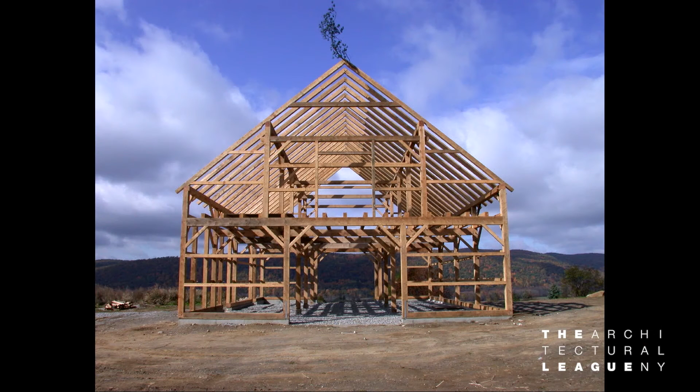It's a bit like the beginning of the 20th century when steel and concrete came to the fore, and there was all this sense of experimentation and the new things that could be possible with the material. But we also looked backward a little bit, so we looked at the history of heavy timber construction and timber construction in the Northeast, and in particular barns.

Because barns have this incredible fit between the structure of the space and the space itself. The form of the barn is so well integrated with the actual structural system. It's an architecture of structure and space, we would say. And of course, barns are made up through these things called bents. So these are two-dimensional constructs that can be arrayed in progression to create the space of the barn.

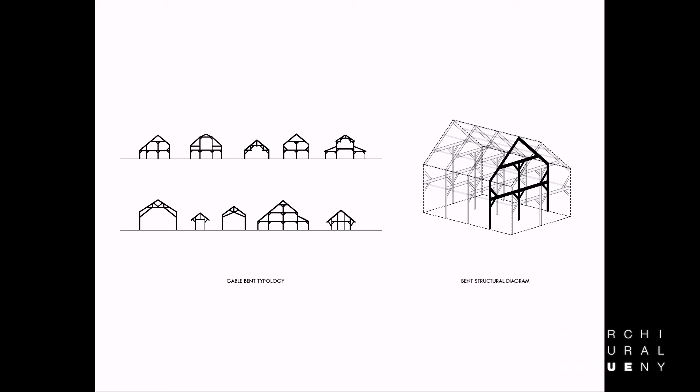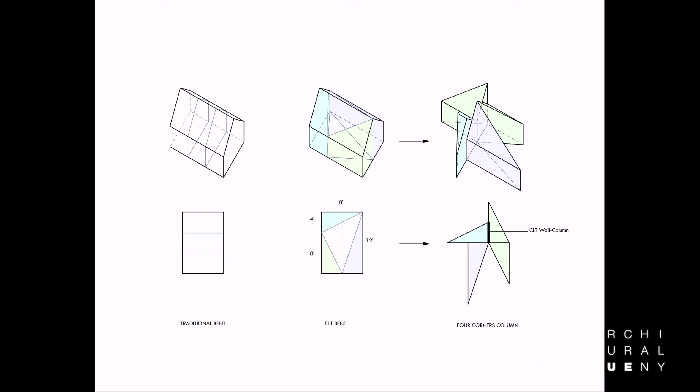But of course, thinking then of the space of barns in relationship to CLT, this new engineered mass timber technology, there's this friction, right? You can't just reproduce the two-dimensional bents and have it work. You have to think about using this planar material and perhaps start to build these complementary corners that could start to be more rigid and come together in a new way.

So starting out with the form of the barn, taking it apart and rearranging these complementary corners, you can imagine creating this endless field of these things where all the three-dimensional bents are now interdependent.

And for the installation, you can see really that the interior spatiality of the barn is turned inside out. It creates this series of rooms that open up to its context. So, corridors, these pockets of space around the installation that open to the windows, as well as a little courtyard in the center.

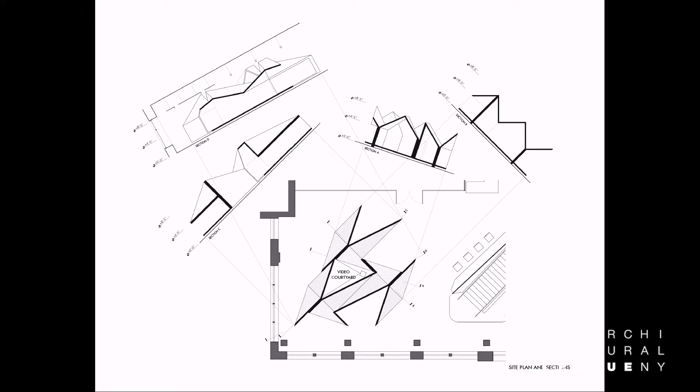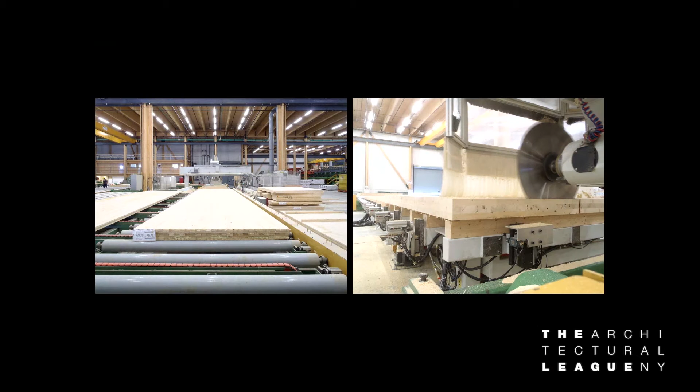And basically, the way the process worked was that Nordic makes these 8-foot by 64-foot slabs of solid wood that you can see in their factory on the left, and then they cut them down to your specifications using their CNC cutting devices, which you see on the right. And we had to work with both companies very carefully through a year-long design process in order to come up with a series of details that were clean and spare, but also were easy to assemble and could still be fabricated by the machines, which had their own limitations.

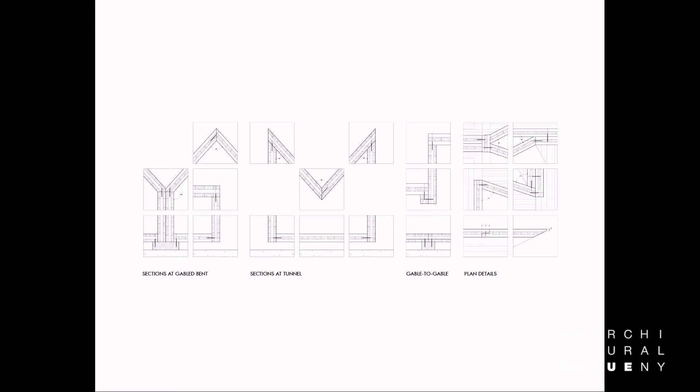And what was great about the process, even though it was a lot of work at the time, was that the results of it, if you planned it out carefully enough, were that you could take this rough structural material and create very large spans with it and have 5 different pieces come together with a tolerance of only 1/16 of an inch.

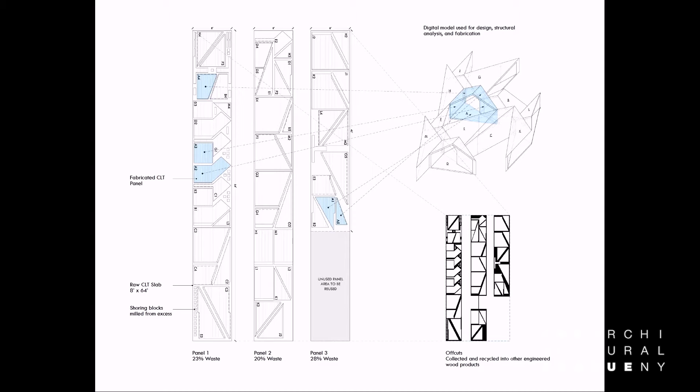Typically CLT is used in commodity circumstances, so most of what they usually do is cut rectangles out of rectangles. We had efficiency targets to meet to get the project on budget, so we had to work through a space-packing exercise to figure out how all these crazy pieces fit onto the 8-foot by 64-foot slabs of CLT.

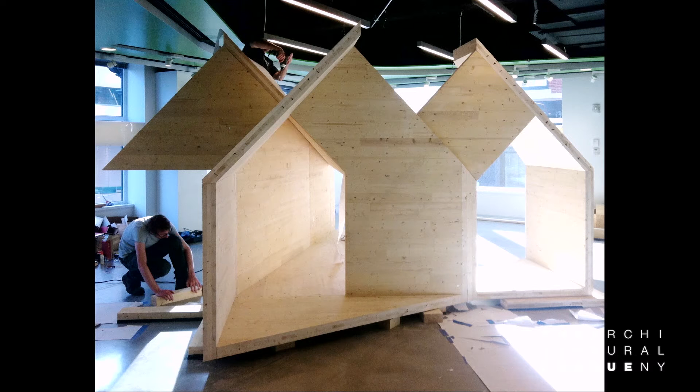We worked with a small group of friends and Parsons students, three of whom are shown here, to construct the project in the field. They're lifting this roof panel, which probably weighs about 200 pounds. Despite the bulk and heaviness of these panels, the project went together really easily—in about 3 days.

What was really nice about the final project was that it didn't result in a single image, but that it was really necessary to move around and through the installation in order to understand it and see how it presented itself from all these different aspects.

We also worked with a video artist based here in New York, Noah Klersfeld, who's in the audience tonight, to figure out how to program the little courtyard that Yasmin showed, in order to encourage people to actually move through and into the space. He generously donated 3 of his videos to play in the courtyard during the entire exhibition.

We also had Nordic drill these little peepholes in the wall of the corridor so that you'd be drawn into the corridor to see that video through those holes, and it would also bring a kind of lighting effect into the courtyard. And that's the view out.

The second project is also a competition, for the Chicago Architecture Biennial last year. For us, the prompt was very intriguing because they were essentially asking designers to design small kiosks that would remain in the city after the biennial would leave. This idea that it would leave something permanent, this act of generosity to the city, was very interesting to us. And of course, the site is this incredible place where the relentless grid of the city meets the beach.

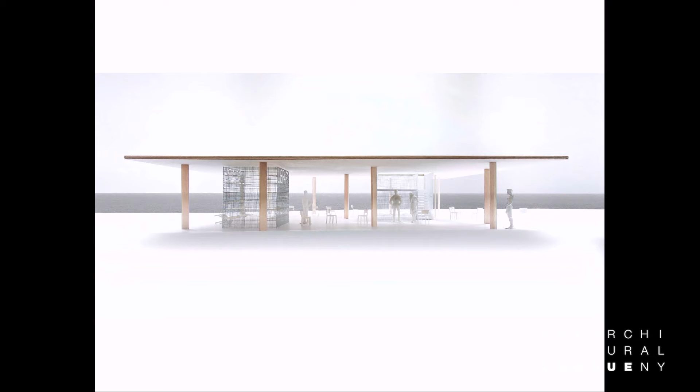The competition actually stipulated a 200 square foot kiosk, and we felt that in order to really have a more active engagement with the city, we would try and expand that as much as possible. So it became this quest, I would say, to design the largest, thinnest wood roof possible.

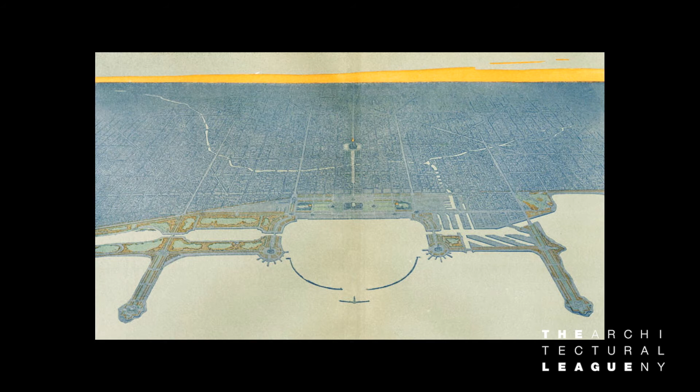And being right on the lake, there was this incredible opportunity to engage the horizon. So the project tries to use the large flatness of the roof to both look at the horizon of Lake Michigan beyond, but also, when you get up above the roof, the roof becomes this abstract plane that can reframe the city.

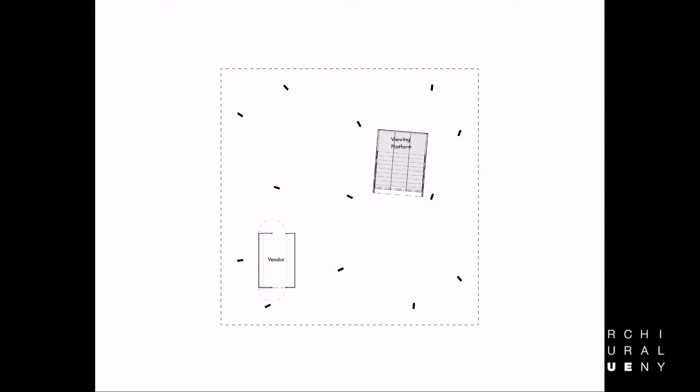So the plan is incredibly simple. Just to give you a sense, the space labeled vendor is the square footage that was asked for in the competition, and the dashed line is what we proposed.

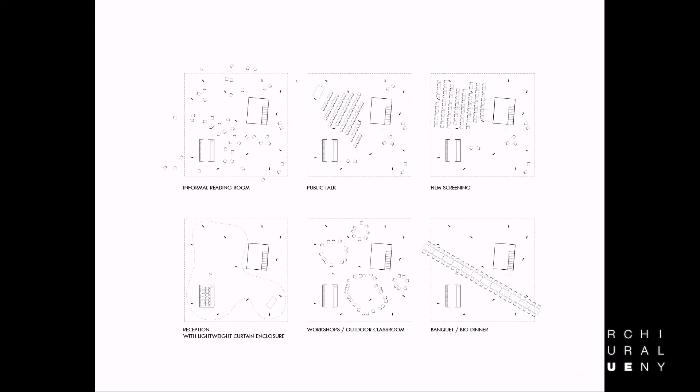In order to do something like this, it had to be incredibly simple. It was really about trying to dissolve the boundary of the kiosk into the city, encouraging different users to come into the space and use it as they see fit. So there are three elements to the project: a very large wood roof, 56 by 56 feet, a set of 13 columns that support the roof arranged in this random pattern, and a kind of leisurely but engaged public that would come to occupy it.

So in order to make this shift in scale, we had to really pare down our material palette to the minimum possible. So we knew that we had to have the structure, so we worked with CLT again for this project. And then for the enclosures, we didn't have much specification on what the enclosures needed to enclose, and so we thought, well, maybe chain link fence is enough. So we just worked with chain link mesh fabric, but both materials in a kind of scale and context that's a little different from where you usually see them.

And we were pretty quickly confronted with this question of, well, okay, what is the biggest wood roof that you can make? And we knew that we could get these 8-foot by 64-foot panels of CLT, but it turned out that the real limitation was not on production, but on shipping, and that the largest size you could reasonably ship was on a 53-foot trailer, and we somehow managed to convince them to put a 56-foot piece onto a 53-foot trailer, and I don't know how that got across the border, but it worked, and that set the dimensions of the project.

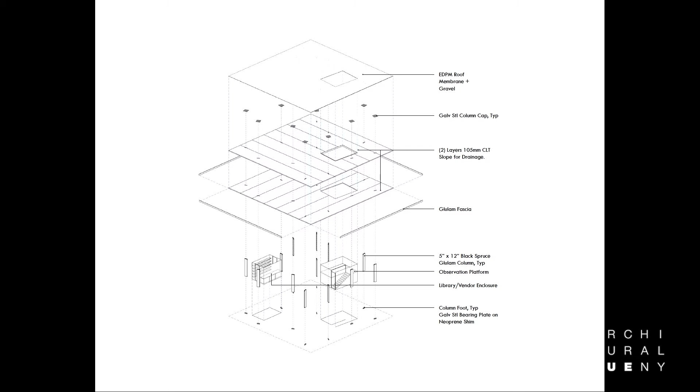And so the scheme seemed fairly simple at the start, which was in order to get this kind of flat wood roof that behaved somewhat like a concrete roof, we would just take 7 panels of CLT and run them north-south, and then put another 7 panels right on top of that running east-west, and support that on 13 columns. What we didn't realize at the time, we were acting kind of naively, was that usually CLT is supported with beams, and so this turned out to be a kind of first of its kind structure, thanks to Brett's perseverance on the project.

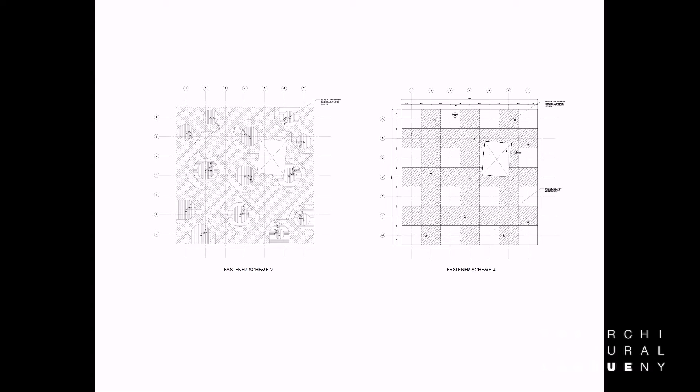So one of the major crises in the project was actually figuring out how to get those 2 layers of CLT to work together, structurally but also economically. So we worked kind of frantically through the last summer, through many different fastener schemes, including one that involved a lot of glue. And you can see the scheme on the left, which was one of the earlier schemes, involved about 15,000 screws, which cost $2 each and wouldn't have worked. And the scheme on the right, fortunately, got it down to about 3,000 screws.

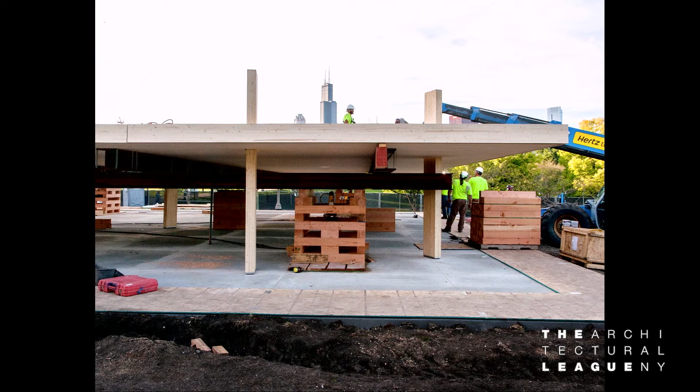And then we were, of course, as Yasmin mentioned, looking at Mies van der Rohe as a kind of spiritual godfather of the project, and especially at the New National Gallery, where they raised up the roof on the columns at the end of the project. And we thought, well, wouldn't it be romantic if that was how it was built? And so we showed this image in the competition. And then after working through it with the fabricator and the structural erector, it turned out that actually was the best way for safety reasons, interestingly enough.

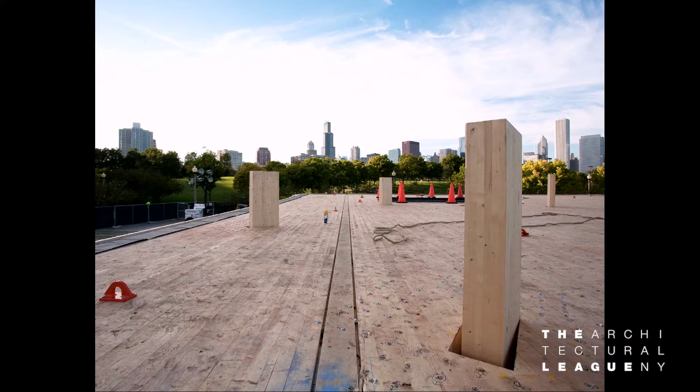So they ended up building it just a few feet off the ground on steel shoring, and then using pneumatic jacks to raise it up. That's the view from the roof halfway through. And then in order to keep that wood ceiling surface as clean as possible, we worked with Brett and with Nordic to develop this column capital detail that actually hangs the roof, suspends it from above rather than supports it from below.

And then I guess the second material that's quite visible in the project is also this kind of rough material of chain link. And we're quite interested in it because, on the one hand, you see chain link everywhere. It's usually stretched horizontally between very heavy vertical posts, but also it has this interesting history in that it was invented by a textile manufacturer. And so we were really interested in trying to think, is there a way to treat it as a textile, with this kind of lightness to it?

And so we worked on the detailing to actually stretch it vertically between the roof plane and the ground, and also to eliminate all the framing at the corners of these volumes so that there would just be this very light touch in the space to delineate those two volumes. So the site is actually just north of the Shedd Aquarium and the Field Museum in Chicago, and it's right on the lake, and has this incredible view back to the city. We were very lucky.

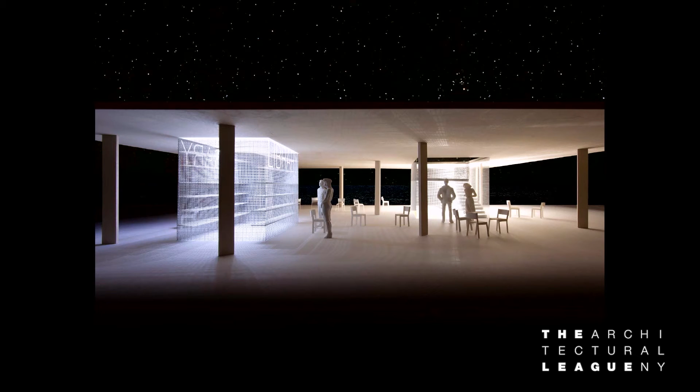And one other aspect of the project, it being out in the world, we really wanted to extend the life of the project into the night. And so we developed a lighting installation that would illuminate the two volumes below through two different color temperatures of LEDs. So one warm, one cool, one more like daylight, one more like moonlight, and then to program these in such a way that they would start to come on just a few hours before sunset and then pulsate throughout the night. And so you saw two views of those at night.

And I should mention these photos are by Naho Kubota, who's an incredible photographer. And she took this one, which really startled us because it looked so much like our initial model. And we really enjoyed that.

And this final project is our proposal for the PS1 Warm-Up competition, which we did this past winter. And we were really interested in making a hybrid between what have become the two standard typologies of the PS1 proposals. One is the environment which takes place under a canopy, and the other is the sculptural or iconic large-scale project that's visible from the street. And we thought the way to approach this was to think about it through the boundary, which we saw as this fundamental architectural act that creates the basic difference between two spaces inside and out, and thus facilitates different types of culture between those spaces.

And we were working at PS1, which is formerly a public school, and so we started looking at old schoolyards and how the schoolyard functioned as this interesting place that was attached to the adjacent institution, but not really of it. It's this place that's usually lightly veiled by a chain link boundary that protects it both from the harsh realities of the city, but also from the school and the stern teachers inside. And so it's this place where students escape even just for a few minutes every day in order to play their games and get into mischief and formulate their own rules, which then come back and infect their work in the school and out in the city beyond.

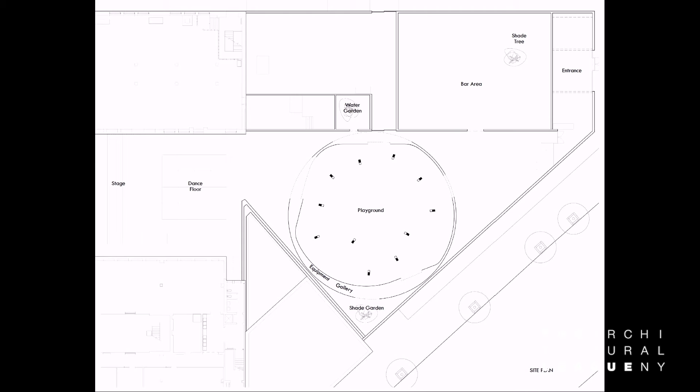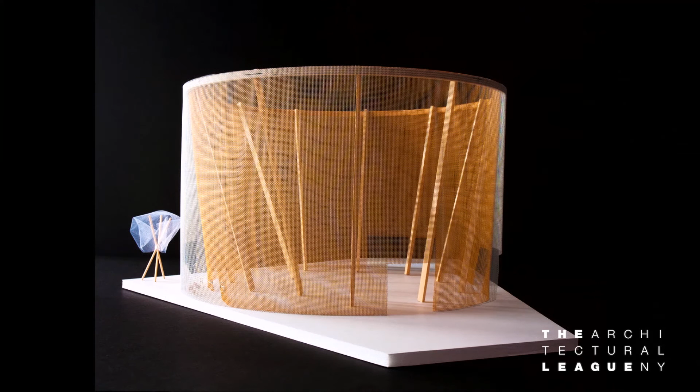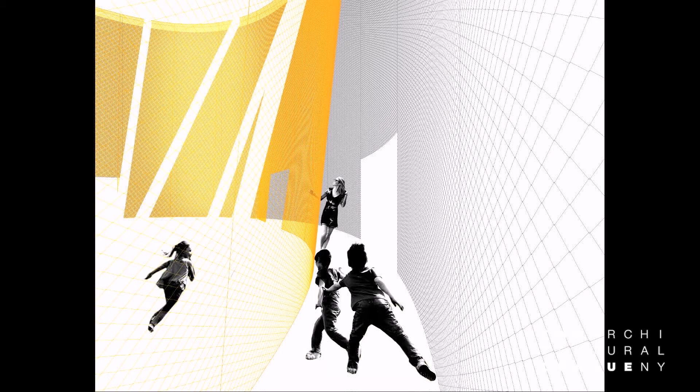And it's also something that's very tall. We proposed a 50-foot tall volume that would very lightly screen the city beyond, to create this necessary precondition for fantasy and for play, this kind of removal. And that boundary, we propose to make it out of two layers of chain link. So one is a vertical outer layer and one that's more playful, one that's just left galvanized, another that's brightly colored, to create a boundary that has a certain depth, that's ready for exploration.

So then we went and talked to Brett Schneider again, and we said, okay, how can we really do this? And we worked through a long series of structural models in order to figure out how to make this thing stand up, but also how to preserve that idea of the lightness of the boundary. And an interesting outcome of this result was that we ended up using the same materials as in Chicago, but in inverse proportion.

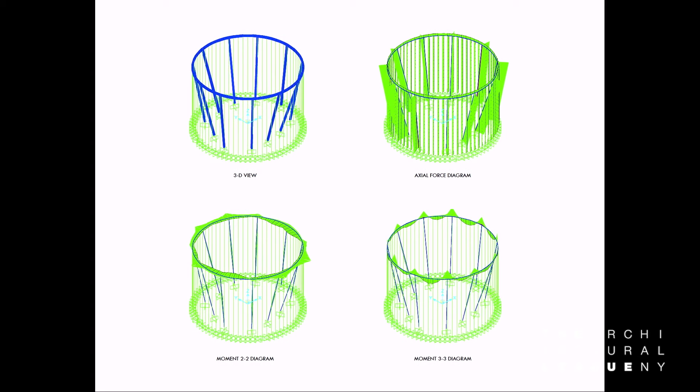And in the case here, both the wood and the chain link are performing structurally. So it took a while for Brett to figure out how to model it in a satisfactory way so he would be convinced that it would be safe.

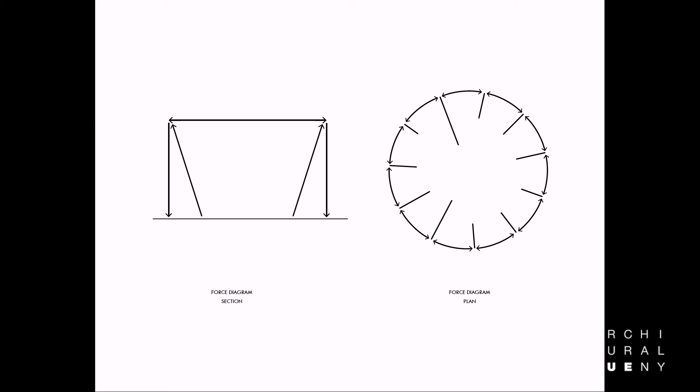And it turned out that the resulting concept was analogous to a bicycle wheel, except stretched horizontally out of plane. So there's a timber tension ring up at the top 50 feet in the air that's supported by a series of canted columns that are analogous to those bicycle spokes, that's then all pulled down and made stable by the chain link that's tensioned to the ground.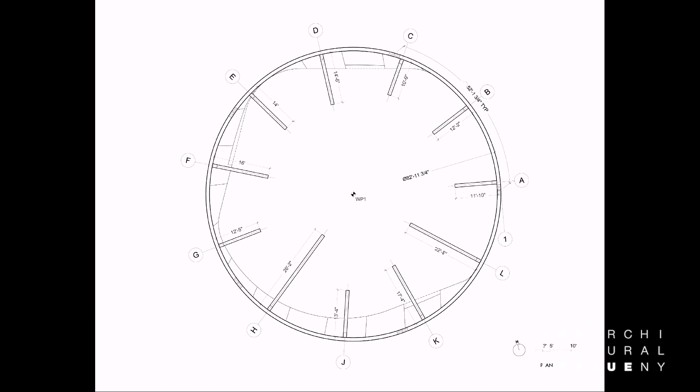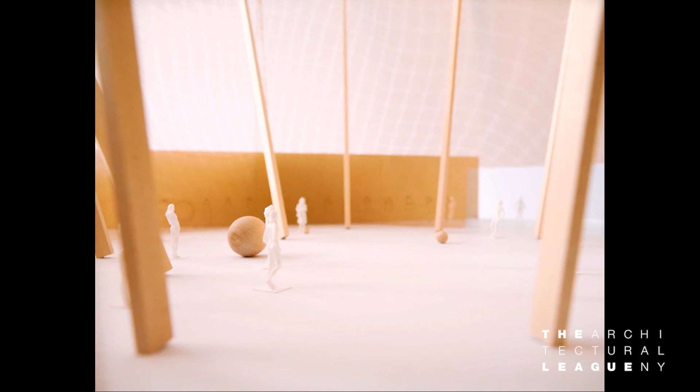And of course there's been 19 years of PS1 installations before us, so we don't really know what's under the ground, so we came up with this flexible system of columns that could be moved back and forth on site depending on what we found, and that would also serve to give a subtle hierarchy to the interior space.

Yeah, so the hierarchy is important because it's absolutely not just a neutral space. I think the way the columns enter the space creates an order that we imagined would be used for different programming possibilities. So on the one hand, there's the warm-ups and there's the free play during the day. But on the other hand, we imagined that players and performers could take advantage of some of these geometries and use them for rule-based movements.

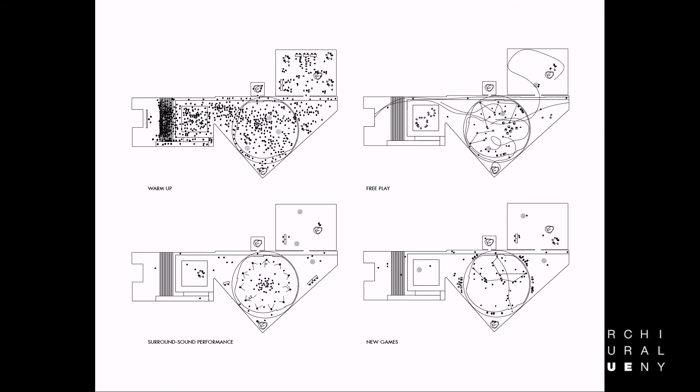So you see some images here. Also, of course, we imagined that this would be scaled to the mass and would be able to embrace that large quantity of people that comes to PS1 during the warm-ups.

And the two layers of chain link serve multiple purposes. One was to create these back alleyways of a secondary system of circulation and storage for some of the materials in the project, but also to create this moire effect between the two layers that would shift and change as you moved, and thus necessitate moving around and through the project in order to fully understand it.

So here in the section you can see how that inner layer moves in and out, and even in the still image the way you get these interference patterns between the two layers. And this resulted in an interesting design challenge because we had to figure out how to take something that was a perfect cylinder on the exterior and project all the openings and panelization inwards to this strangely shaped object on the interior that created this interesting dialogue between the platonic exterior and something a little stranger inside.

The double layer also helped to shade the courtyard, which I'm sure many of you know can be brutal in the summer, but also to cast shadows onto the ground to create a third layer in this moire effect.

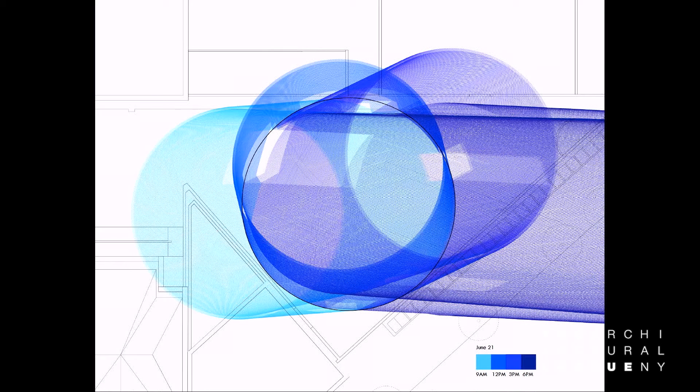We also imagined that there would be a series of elements for playing, so hula hoops, jump ropes, frisbees, these very minimal tools for rule-based movement that could be stored between the layers of chain link. And of course, continuing our investigations with chain link, we imagined there could be these overscaled balls that could confound both the scale of the players, but also the scale of the space, as well as these very large scale model trees that were supposed to be made simply of lumber and construction netting for diffusing light and water.

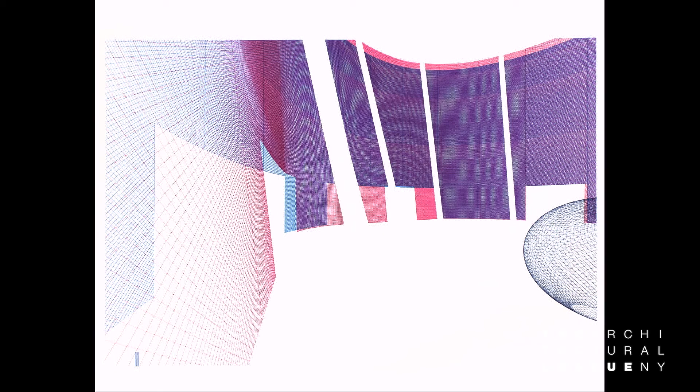But really, all these elements conspire together to create this wireframe world. It's this very, I guess, a space apart where we imagined play would be possible. And we also worked with a lighting designer to think about the reading of the volume at night from the street and to find a way to make that very, very large volume hover in the space at night.

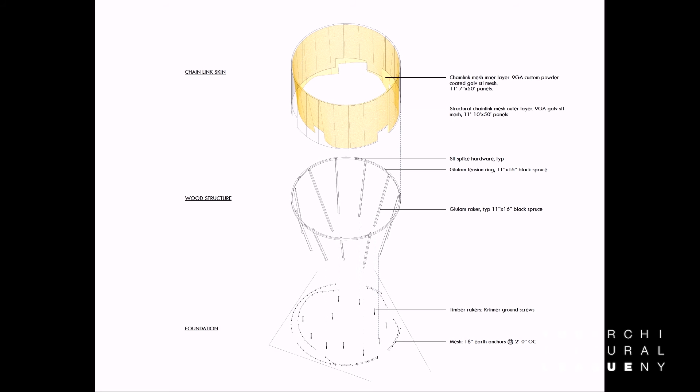So again, in order to make something so large, we had to economize and treat everything structurally. And so this was the basic kit of parts, a bunch of wood and chain link and some ground screws to support it. We also had to think through how to lay it out, knowing that we probably wouldn't be able to hire a surveyor to do it. So we had to take that interior unusual geometry and think about how to rationalize it.

And then we worked with a contractor to think through how it would be built, and it turned out that probably the easiest way to do it would have been to build similar to Chicago, build the entire timber ring just a few feet off the ground, attach all the columns to it with hinge connections, as well as all the bales of chain link, and then lift it all at once in a single move, turning the construction itself into a kind of event of the project. And we'll just finish by playing this animation.

So our third and last presentation this evening features the work of Ultramoderne, located in Providence, Rhode Island, and led by Yasmin Vobis and Aaron Forrest. Yasmin teaches architecture at the Rhode Island School of Design. She received her Bachelor of Arts from the University of California, Berkeley, and her Master of Architecture from Princeton University. She is also a recipient of the 2016 Rome Prize in Architecture. Aaron is an assistant professor of architecture at the Rhode Island School of Design and has a Bachelor of Arts and a Master of Architecture from Princeton University.

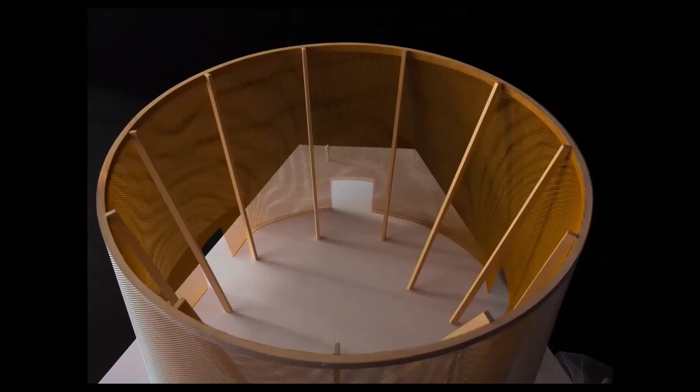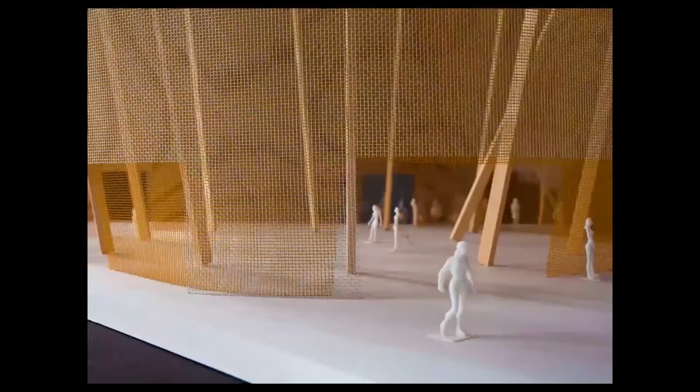Okay, so we're going to start with a story. So Yasmin and I met in fall 2006. Shortly thereafter, we began our first project. At the time, live webcams were still in vogue, and Bryant Park had a pretty good one. If you spent enough time on the site, you could find a direct link to the latest image, which was updated every 10 minutes. So we began downloading the images and collecting them on a hard drive without much of a purpose in mind, except maybe to create a little time-lapse video. They became a nice chronicle of the use of one of the most photogenic public spaces in the country. The way people would move chairs around,